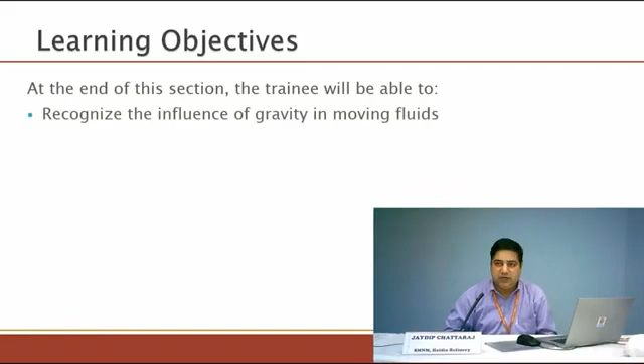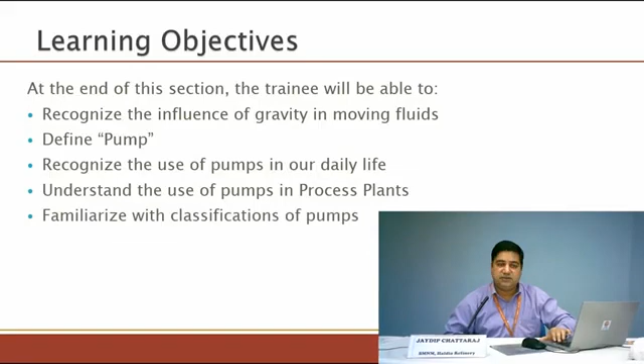Good morning. Myself, Jaydip Chattaraj. I am Senior Manager, Mechanical Maintenance. I will be giving a training on the topic pumps and compressor. So, what are the learning objectives? By the end of this course, we will be able to recognize the motion of the fluid, pump, what is a pump, and what it is used for in our daily life, understanding the use of pump in our process plant, familiarization and classification of the pump. This is basically the content of the course.

Now first we start with a simple analogy, the pump and our human body. In our human body, the heart functions similar to a pump; it pushes the blood to all the parts of the body. The same thing is happening in our process industry also. We need to carry various liquids, various process fluids from one place to another, and for that a pump is required. So this is our human body pump, which gives the fluid, incompressible fluid, to the various sections of our body, similar to a process plant.

So this is the heart. Now, for the blood to get elevation to the different parts of the body, to reach the head, it requires a head. So for that we require that head, or we require the pressure, which our human body pump gives. It maintains the pressure according to the need, from low to high.

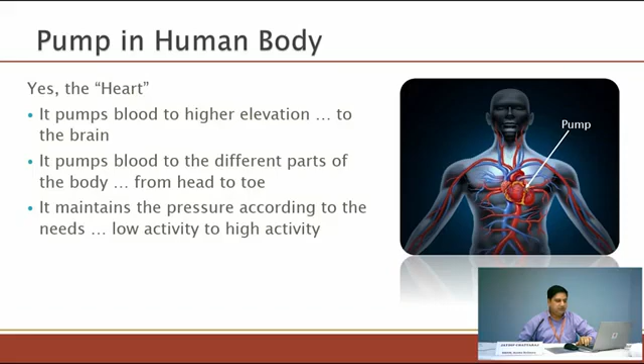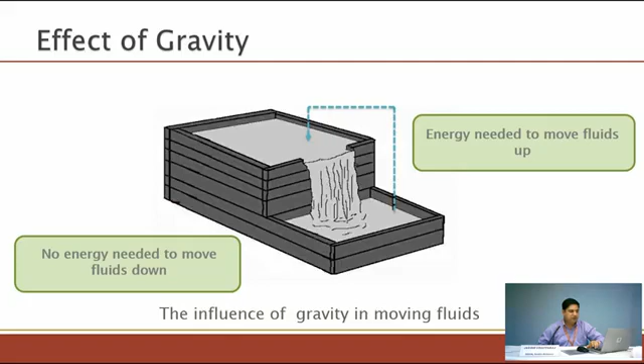A similar activity in the process fluid or any fluid: it generally comes down with gravity. It doesn't require any pump or anything. The liquid will flow from an upper portion or an elevation downwards in a normal process, due to gravity. But if we want to do the reverse, lift the liquid from a lower level to a higher level, we need energy to move it.

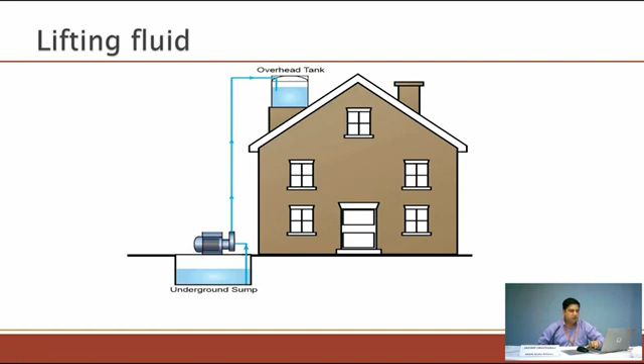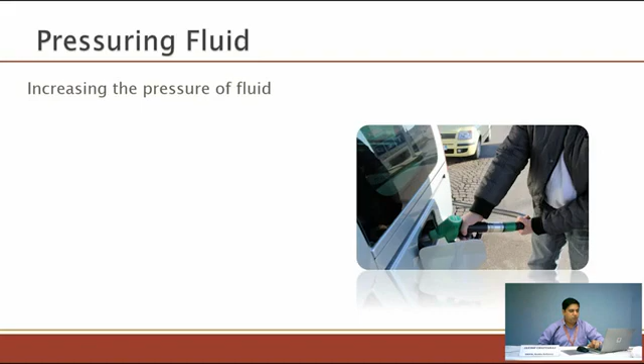So basically a pump is pressurizing the fluid, increasing the pressure of the fluid. This is a simple example in the petrol pumps. You see there is also a very small pump which is running and pressurizing the gasoline, which will be forced and loaded to your tank. So this is what a pump is. A basic definition: a device that moves the fluid through a mechanical action. Basically pumps do a conversion of energy, kinetic energy which is converted into pressure energy, and force the fluid to a higher elevation, longer distance, or a higher pressure.

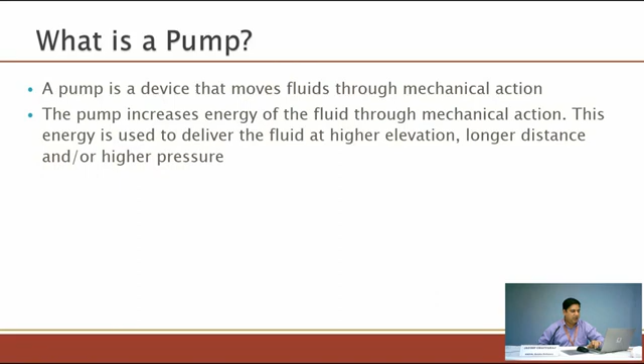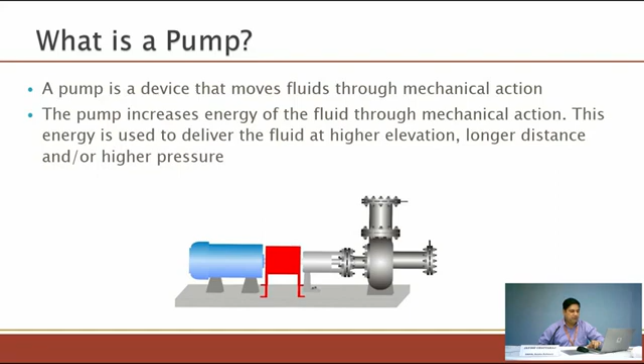This is a picture of an industrial pump. The blue portion is the motor or the driver. In between there is a coupling which couples the driver with the pump, and the pump pressurizes the fluid from suction to discharge to the final location. Now this is the application in the process plant. General application of pumps in industries such as refinery and petrochemical is transferring the liquid.

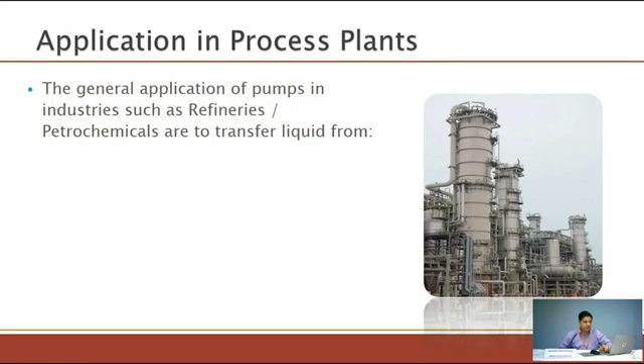This is a small glimpse of our refinery. The long columns are there and pipings are also seen. Now pumps are required to push the liquid from the bottom of the tank to this column, or from the column extract to another location. Basically from the lower pressure to the higher pressure region, or the lower elevation to the higher elevation.

Now we are coming to the types of the pumps. The pumps are basically of two types. One is kinetic or rotary type, another is positive displacement, where the incompressible fluid is positively moved from one place to another and it increases the pressure. Kinetic or rotary pumps are of two types: centrifugal and special service. Special service will go into detail.

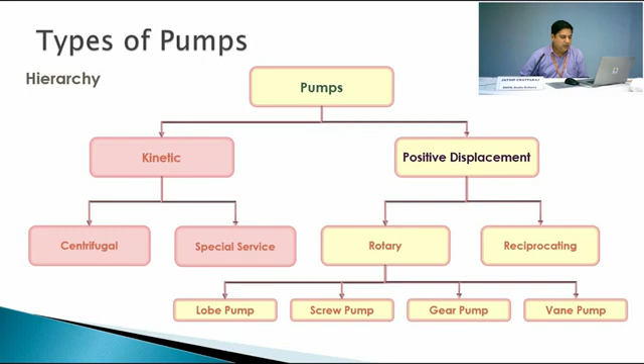And positive displacement, there are two types. One is rotary type, where rotational motion is creating that positive displacement, and another is reciprocating motion creating that positive displacement. Rotary pumps are divided into 4 different categories such as lobe pump, screw pump, gear pump and vane pump. We'll see some examples of such pumps.

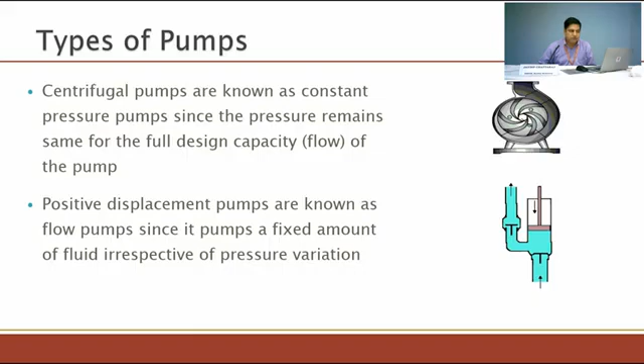The difference between centrifugal and positive displacement is that in a centrifugal pump we have a slippage, meaning not 100% of the liquid is forced to the discharge, but in a reciprocating pump 100% fluid is pushed through the discharge. So that is why it is called a positive displacement. But in centrifugal, some part of the fluid is going to the discharge and some part which could not attend goes back or slips.

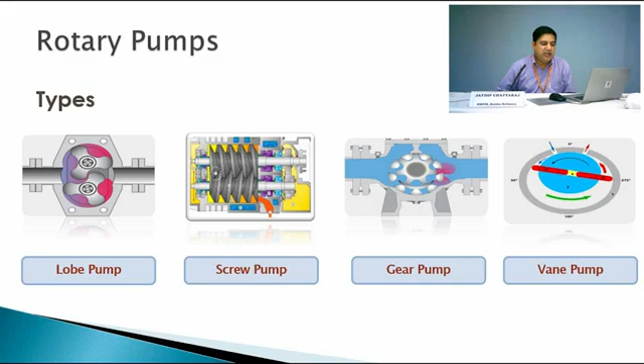In a centrifugal pump, a similar thing happens. When an impeller is being churned in a fluid, it pressurizes or increases the velocity of the fluid at the end and it gets a head or a pressure which is being collected in the discharge pipe and thrown to the process.

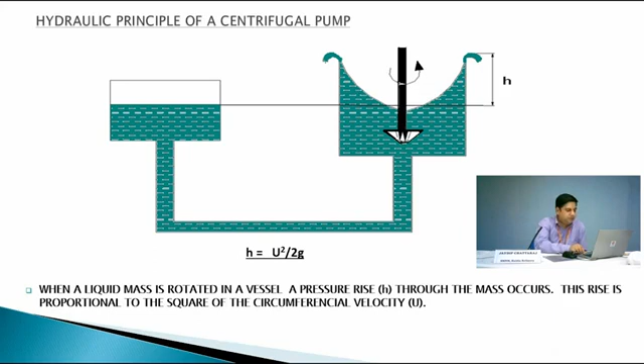This is another example of the basic operation of the centrifugal pump. The fluid is going to the suction eye of the impeller and it is being rotated by the impeller and it gets the motion. In the volute casing, you have seen that there is a less gap region. This area is called the cut water section, from where it collects the liquid and it's going through the more gap region and going to the discharge pipe.

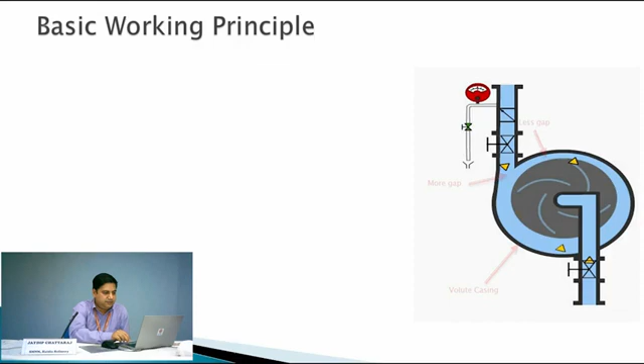So in the first region there is a high velocity but low pressure fluid, and in the wider region there is a low velocity, high pressure fluid. Basically the velocity is converted into the pressure. So the centrifugal pump works on this principle of centrifugal force.

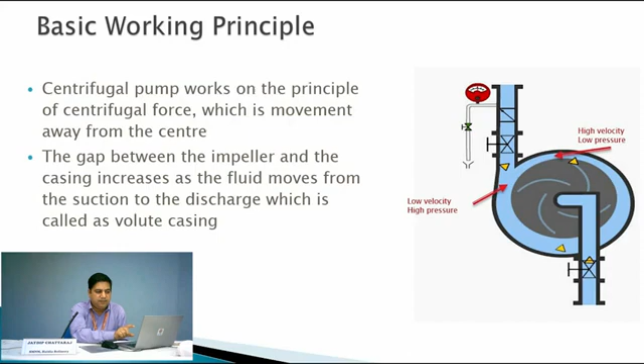And the gap between the impeller and the volute is constantly increasing, which is adding the extra liquid to this gap, and the liquid is getting a velocity through the rotational movement of the impeller. That rotational motion gives a velocity to the fluid, and this velocity, when it gets resistance, transforms into the pressure.

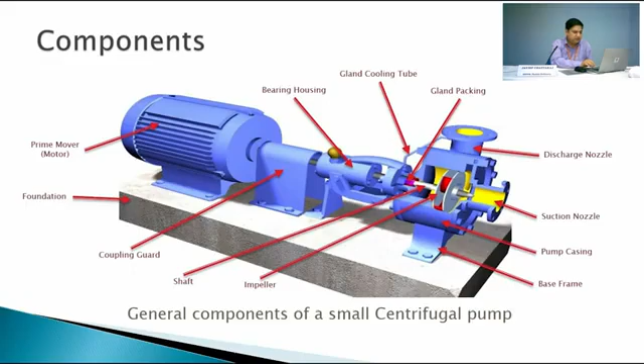And now the main components of this pump, shaft and impeller. The shaft is the main rotating part, which is transmitting the motion from the motor to the impeller, and the impeller is the thing which is giving the rise of velocity and pressure. This is a single stage pump.

Now for the multi-stage pump, the same thing is happening, only instead of one impeller, there are a number of impellers, and the discharge from one impeller is going to another impeller's suction, and then the discharge of the second impeller is going to the third impeller, then from the third impeller to the fourth impeller. This arrangement is a little bit different because here we need an axial thrust balance.

A pump has two sides, one is the higher pressure side and another is the lower pressure region. So there is always a thrust or force which is pushing these impellers from the higher pressure to the lower pressure, and this thrust needs to be balanced. That's why the impellers are arranged in such a way that one thrust and another thrust cancel each other out, and ultimately there should not be any imbalanced thrust.

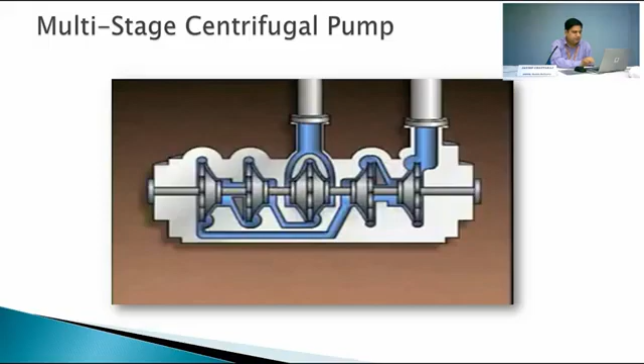A multi-stage centrifugal pump has two or more impellers. Why do we need a multi-stage pump? Because if we try to do it with one stage impeller, that impeller becomes larger. If our pressurization requirement is more, we require a much larger impeller, and such a larger impeller may not be feasible to manufacture. So in that case, we require a number of smaller impellers, splitting that large impeller into several impellers, so that the effect of the head rise remains the same, but the volume or size of the pump remains small.

So this is one construction of the multi-stage pump. This pump can be made with one impeller, but that impeller size will be very big, combining the diameter of all these four impellers. So it will be a large pump. To reduce the size of the pump, this type of multi-staging arrangement is done to get the required pressure.

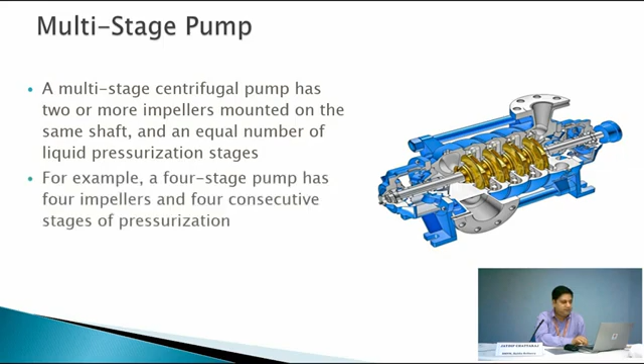Now the most important thing, why do we require the pump? We require the pump to overcome the head. In the first few slides I showed that the heart pushes blood to all parts of the body, overcoming the resistance. And in another photo I showed that water falls from a higher portion to a lower part through gravity, but if we want to do the reverse, we require energy to overcome that head. So understanding this head is very important, because that determines the selection, designing, or sizing of the pump. So this is the picture.

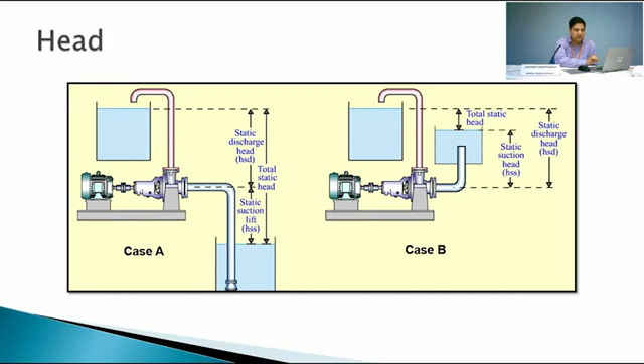In the second case B, the total static head is the difference of the discharge static head and the suction static head. This is explained in the equation: the static head is measured by subtracting the static suction lift and static discharge head.

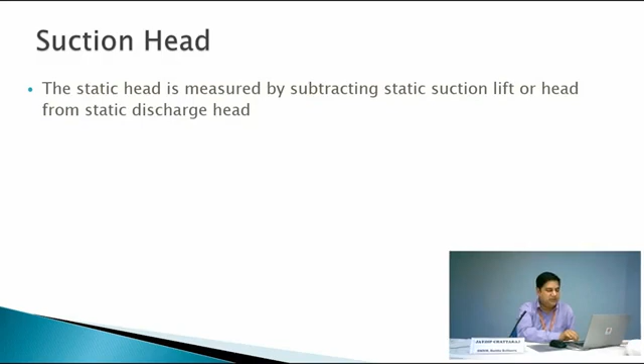Now, it is not always the arithmetic sum. If the pump is taking suction from a lower level, it may have a vacuum, so it's a negative pressure. So the formula is that for total static head, the suction head is basically a vacuum, so it is minus. Ultimately, the discharge head plus suction head will become the formula. And for the case 2 pump, it is the discharge head minus suction head.

Now we have to understand another important thing, the net positive suction head, which is required and is one of the utmost criteria for selecting a centrifugal pump. Definition: the net positive suction head is the real or actual positive head above zero pressure of the absolute energy which the pump requires to lift.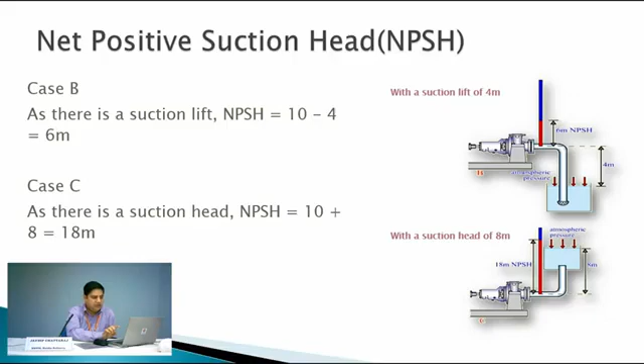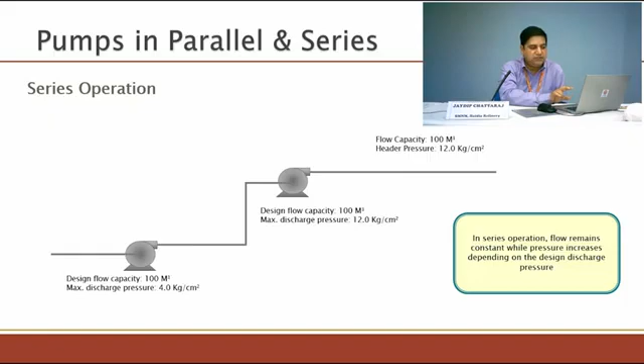But in series operation, it's different. If two pumps are arranged in series, the flow remains the same at 100 meter cube, but the pressure goes on adding. First pump's maximum discharge pressure was 4 kg, and for the second it is 12 kg, but the second pump's suction pressure is 4 kg, so the actual pressure added by the second pump is only 8 kg. So the first pump has a delta pressure of 4 kg, and the second has a delta pressure of 8 kg, and altogether 12 kg pressure is generated by these two pumps in series.

Now we will talk about codes and standards of the pump. As we know, the pump is a universal thing, available in the market with vendors, and when we require a pump there should be some basic standard which the purchaser requires and the manufacturer follows. So there should be a bridge between the manufacturer and purchaser, and these codes are for this.

In the petroleum industries, we generally use API standard. API is American Petroleum Institute. It gives a standard for all purchasers and manufacturers of the petroleum industry, and there are a number of codes, generally denominated by number. Standard number API 610 is the standard covering the centrifugal pump, how it will be designed, its features - these are all written in this standard, which both we and the manufacturer follow.

So whenever we want to purchase a pump, we mention this standard number only - we want an API 610 pump. Then all requirements for API 610, how the pump will be designed and selected, all guidelines are there, and both purchaser and manufacturer are guided by this standard. Both have to comply, meaning the purchaser cannot ask for something not possible, and the manufacturer cannot design something cheap or not good for the service.

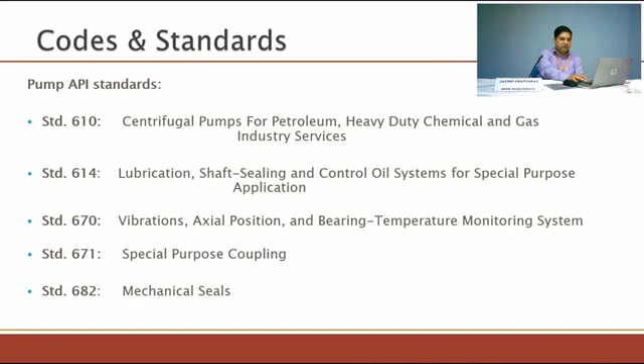Now next we will go for a compressor. In the first stage, what we talked about were pumps, because in the process industries we have two types of fluid: one is compressible, one is incompressible.

Compressible fluid means gas, and incompressible is liquid. For incompressible fluid, we use a pump to transport from one place to another, from lower head to higher head. A similar thing is required in industry for gases. But there is a lot of difference between the compressible and incompressible fluid. The properties are different, the centrifugal forces are different, so the equipment is different. We require different equipment.

The equipment required to transport a liquid from a lower pressure to higher pressure region is not the same as for a compressible fluid. Now we are talking about a compressible fluid, that is gas.

This is our learning objective: understanding compressors, identifying their types and their function.

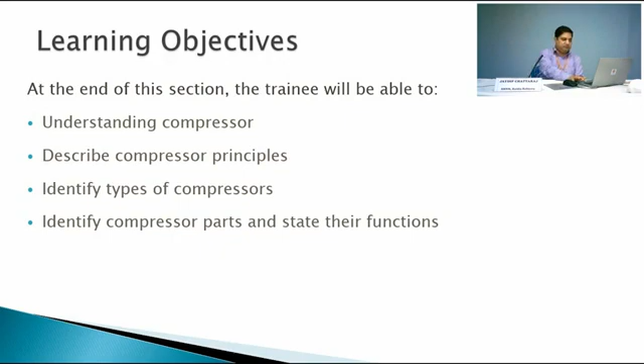So these are the contents of this course.

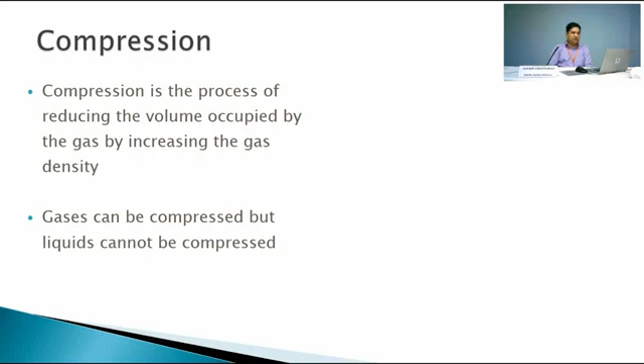Now, first thing, compression. What we need to know is compression. A compressible fluid, gas, can be compressed, whereas liquid cannot be compressed, but gas can be compressed.

If there is a volume V, pressure P, and temperature T, and these are constant, then if you increase the pressure, the volume will decrease and the temperature will also increase. I think you have already covered this in your basic physics course, which we show here to correlate academic courses with industrial application.

This is the basic thing you read in your basic physics book, but this physics principle is applied in our compressor. With this basic physics principle only, we are doing complex designing of compressors. So this is the simple thing.

If we keep the volume half, then the pressure will increase and the temperature will increase.

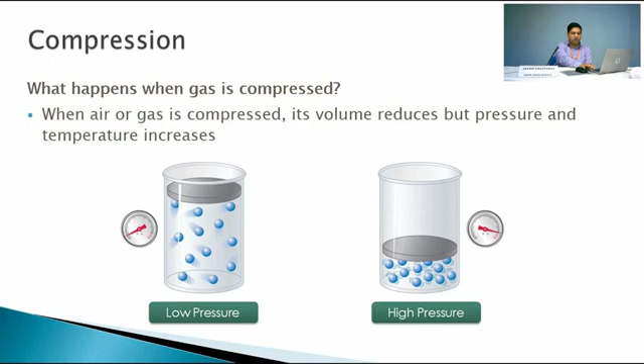So in molecular movement, at low pressure the molecules are in a distributed state, and at high pressure molecules are concentrated. So what does a compressor do? It gives energy. It compresses the molecules to a lower dimension or lower volume.

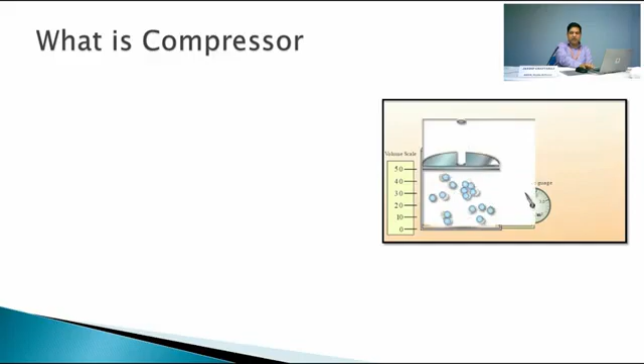So this compressor looks similar to the pump, but it requires more energy because an incompressible fluid requires less energy to get pressurized. In an incompressible fluid, the liquid molecules are almost closely packed, so no energy is consumed in compressing the internal molecules. So whatever energy we give is directly converted into liquid head energy.

But for the compressor, it is not so. Whenever we give energy to the compressor, it will first increase the density of the molecules, increase the compactness of the molecule, and then it will get the pressure rise. So the consumption of energy in a compressor is much higher than in a pump.

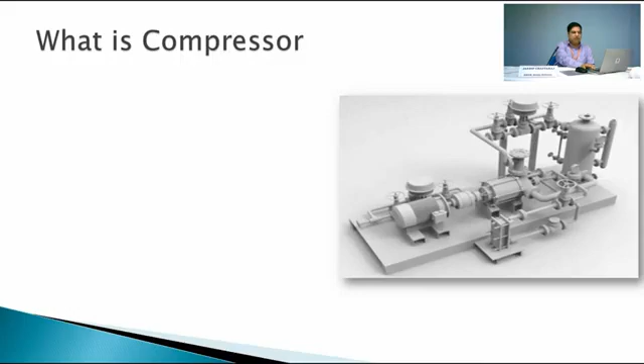Now, in our daily simple life, where we see the use of a compressor: when we try to inflate our tire, we use a compressor or a simple hand pump to increase the pressure of the air and put it into the tire.

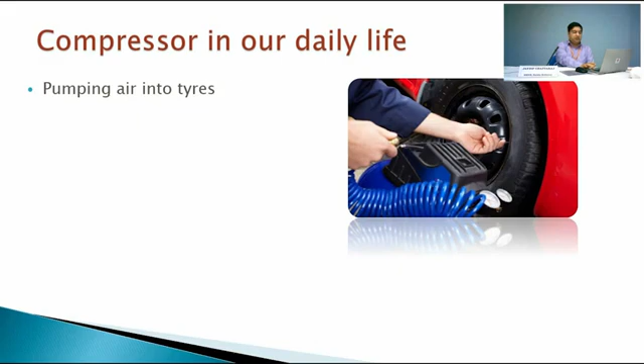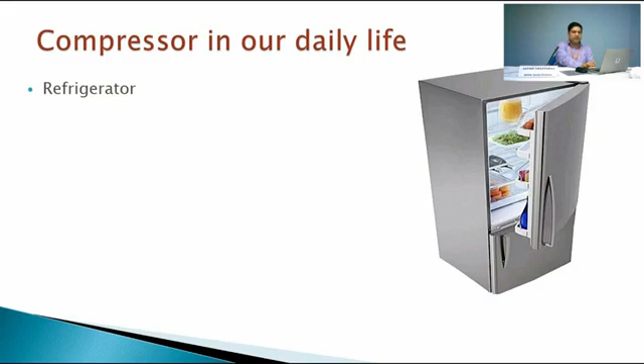Another example in our natural daily life is the refrigerator, where we have one compressor which compresses the refrigerant gas from gaseous stage to liquid stage, and then heat is absorbed, liquid is again converted to gas, and this cycle goes on.

Now, in industrial applications, when we are handling hydrocarbons, when we heat hydrocarbons in our industry, some of the lighter hydrocarbons are converted into gas. As we know, methane, ethane, propane, meaning C1, C2, C3, these are all in gaseous state.

In the oil industries, the input well or crude oil is a mixture of all sorts of hydrocarbons. When we heat them up, they get detached and the smaller hydrocarbons go out as gas, such as LPG gas, which is C3.

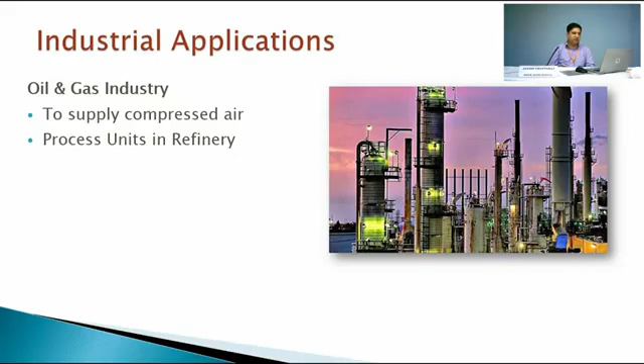So we need to transport this gas from one place to another, to store this gas from a column to some other tank or a bullet. We require this gas to be forced from a lower pressure to a higher pressure region, or from a lower head to a higher head region. For that we require a compressor.

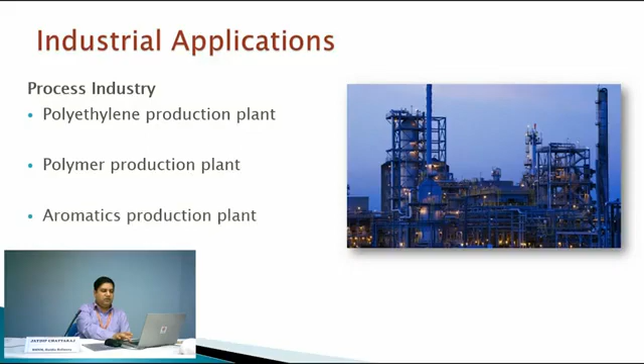So basically the transportation of the gases, and it is also used in the air separation plant. In the steel industry also, a lot of gas is being generated in the furnaces, the blast furnace. A lot of gas, burning blast furnace gas, is being generated. That also needs to be transported, and there also we require a compressor to transport this gas. In the petrochemical industry, there are also polymers, polyethylene. We also require a compressor for the transportation of the gas.

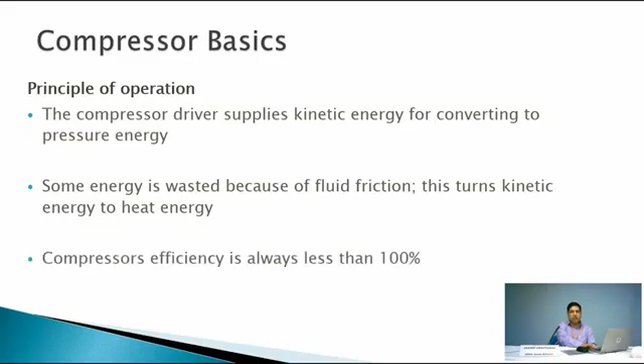Now let us come to the basic operation principle, which is similar to the pump. It's all about changing the kinetic energy to pressure energy. As I have told you during the session on pumps, some energy that we are giving as input is lost due to friction. Similar is the case of the compressor. Whatever energy we are giving, some is turned to gas kinetic energy, and some is wasted due to friction. So the overall efficiency is always less than 100%.

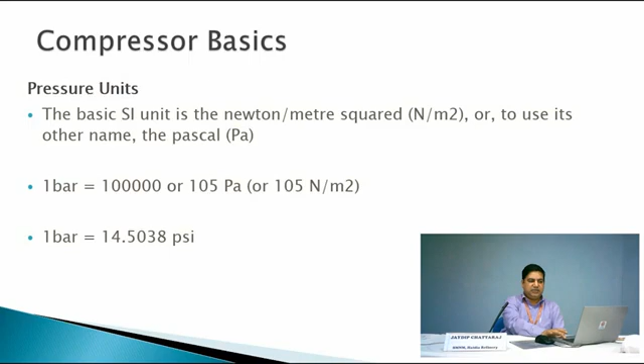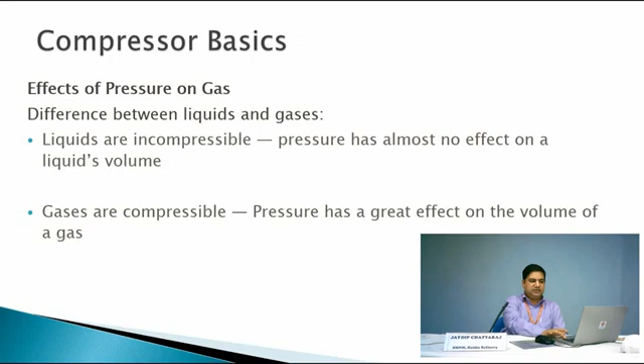Now some basic things: the units of measurement, Newton per meter square and the Pascal. 1 bar is equal to 14 psi, because these are required for understanding further. So these are the basic theory. This means the difference between liquids and gases. Liquids are incompressible and gases are compressible, and that's why the theories are also different. Now for the compressor basics, we require 2 or 3 gas laws. One is Boyle's law, another is Charles' law.

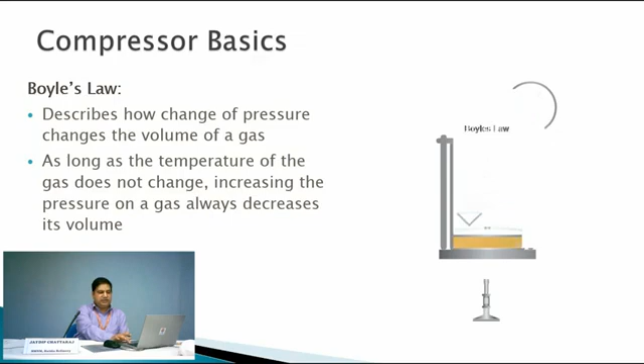Now for Boyle's law, as long as the temperature of the gas does not change, increasing the pressure will decrease its volume. This is very simple. If we increase the pressure, the volume will get decreased. Basically, the pressure into volume will remain constant. If we increase the pressure, volume will decrease. Volume will increase, pressure will decrease.

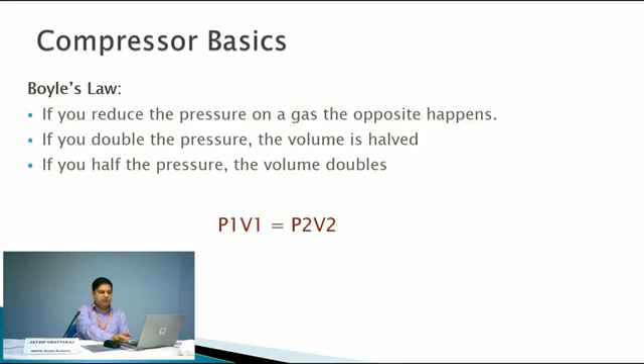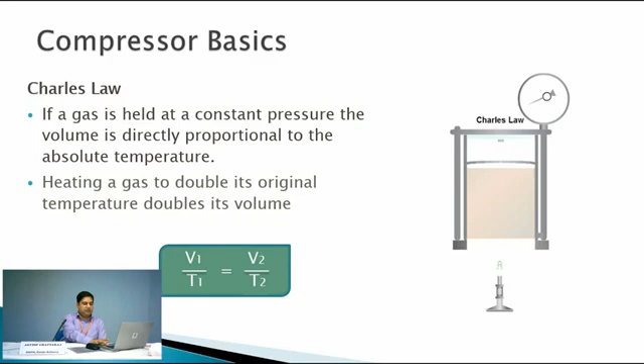And Charles' law is with the temperature. If the gas is held at a constant pressure, the volume will increase if the temperature is increased. So this is the formula, V1 by T1 is equal to V2 by T2. And now combining these two gas laws, the relationship is P1 into V1 by T1 is constant. P1 into V1 by T1 is equal to P2 into V2 by T2. And this is the basic principle which is used in compressor design, in all compressors.

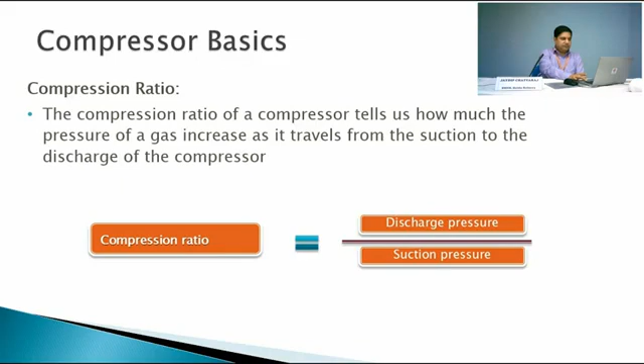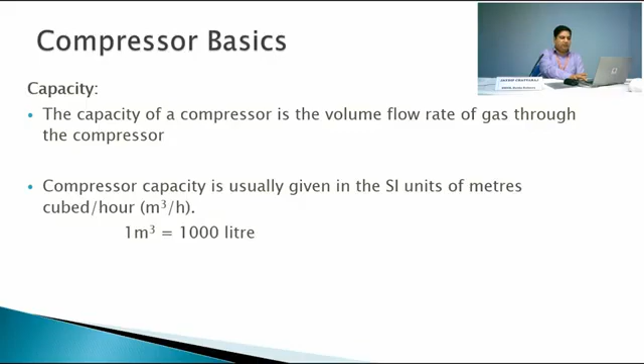So the first thing is the compression ratio. What will the compressor do? It will increase a lower pressure air to a higher pressure. So there is one discharge pressure and one suction pressure, and the discharge pressure by suction pressure is the compression ratio. This is the basic guiding principle of designing a compressor. Now, what is the capacity of the compressor? Capacity of the compressor is basically the volume flow, how much volume is flowing, and that can be simply measured in meter cube or in liter. So the typical parameters of a compressor are suction pressure, discharge pressure, suction temperature.

As I have shown in the pump, the compressors can be connected. In fact, in industry, we always see the compressors being connected. First stage, second stage means compressors are connected in series to reduce their size. As I told you in the pump section, if we design a pump with a single impeller, then the dimension of the pump will increase manifold. So we need to reduce it, so we divide it into a number of stages. Similarly, for the compressor, we need to divide into stages so that the entire system for a desired purpose remains compact.

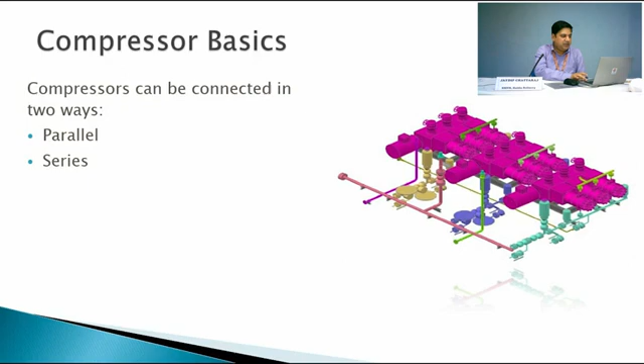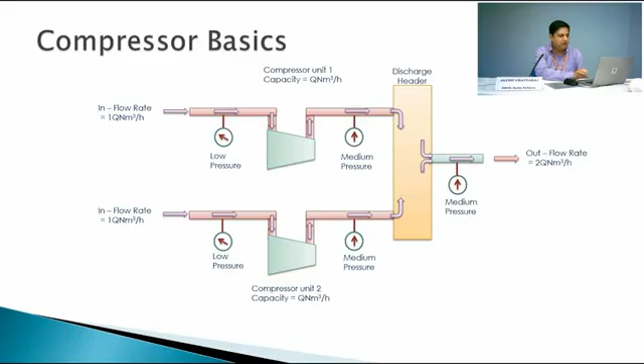So here also we are seeing a parallel connection and a series connection. Parallel connection always increases the capacity. These two compressors connected in parallel will increase the flow but not the pressure. When the compressors are connected in parallel, they add the flow but not the pressure.

And in series connection, the volume or the flow remains the same, but the pressure will increase. Means one compressor will increase the pressure head, the second compressor will further increase its head, and in this way they go on adding the heads, and ultimately the compression ratio, or the discharge head over suction head, will increase.

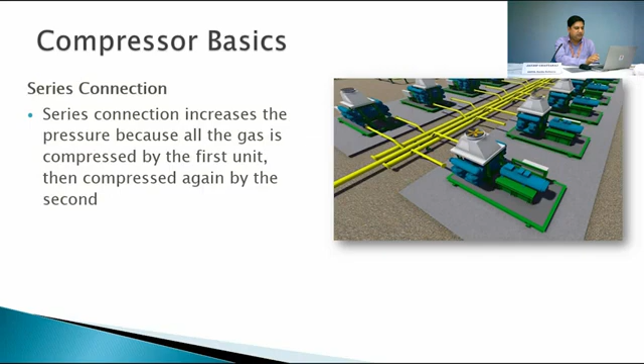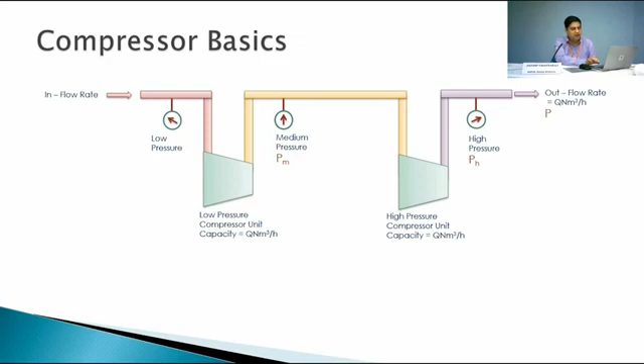So this is a series connected compressor. The flow is getting into the first stage, then a medium pressure is generated, and that medium pressure is going to the second stage, and it is giving a higher pressure. But the volume flow rate in the first compressor is same as the volume flow rate at the last compressor. So

When compressors are connected in parallel, what can we do? If we are connecting 3 compressors in parallel and then we are running 2 compressors, then if we require to stop one compressor, we can run another compressor and stop another, so the total volume flow remains the same, and we can make one compressor redundant for maintenance.

So that is the basic principle for connecting the compressor in parallel. And whenever full capacity is not required, we can stop one compressor. But if we use the compressor in series, then the flow will be stopped if one compressor is being stopped.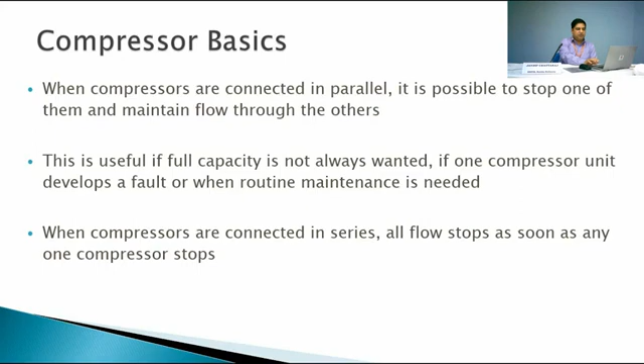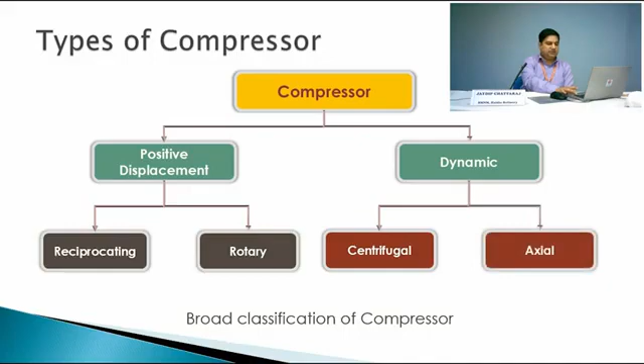Now the next is the selection of the compressor. How do we select the compressor? Basically what do we require, why do we need a compressor? We need a compressor to transport some gases of a particular volume as per our requirement from a certain low pressure region to a certain high pressure region. So our requirement is a quantity of gas or the flow of gas and the delta pressure, means the difference between the high pressure and the low pressure. So these two are the basic requirements. With this requirement, we are going to select the compressor.

Now, in the first case, if we require a high pressure but low flow, then we should select a reciprocating compressor. Because a reciprocating compressor is a positive displacement type compressor, its compression ratio is higher, so it can increase the head from lower to higher, but it has a limitation in volume. For the volume capacity, the compressor size will increase like anything, means the compressor will become bigger.

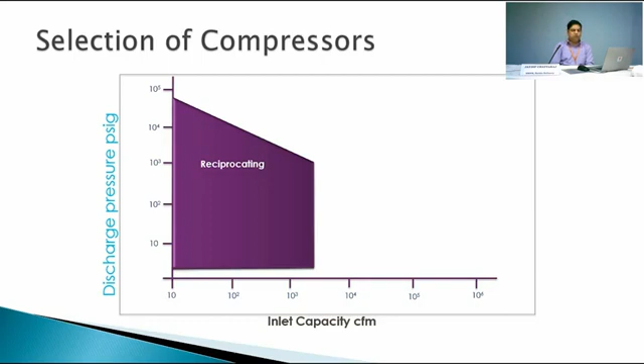So if we require a very high volume, then this reciprocating compressor will become very robust or very big. That size is not suited. So for the reciprocating compressor, the selection range is high head and low flow. Wherever flow requirement is low and the head requirement is high, we select a reciprocating compressor.

Now when the head requirement is moderate but the flow requirement is more, we require more flow. So in that case, we are using a centrifugal compressor. But for very low flow, a centrifugal compressor is not suitable. There will be a problem of surging. So a centrifugal compressor should have some minimum flow. A reciprocating compressor can be designed for a very minimum or low flow, but a centrifugal compressor cannot be designed for a low flow.

And for a very high flow and low pressure region, axial compressors are being selected. And this middle portion is a screw compressor. A screw compressor is something in between a reciprocating compressor and a centrifugal compressor. It is a positive displacement compressor, so its basic principle of operation is same as a reciprocating compressor, but as it is rotating, its efficiency is like a centrifugal compressor, so it's operating between centrifugal and reciprocating.

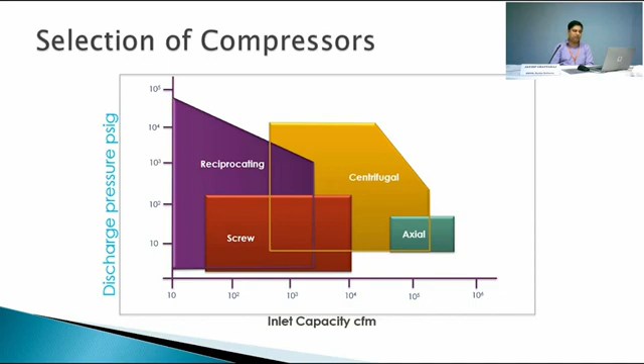But a screw compressor also has a limitation, it cannot work with a very low flow. It will also have a problem of surging.

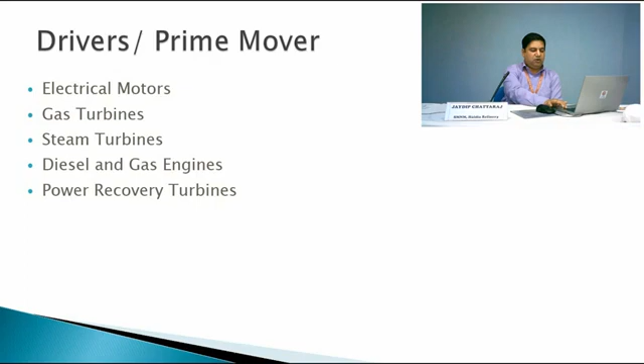Now coming to the driver or the prime mover. For both the compressor and pump, we require a driver or a prime mover to give the energy, meaning electrical energy or steam energy or something, which needs to be given to this pump or compressor to energize the liquid, either compressible or incompressible. So what are these drivers or prime movers? These are electric motor, gas turbine, steam turbine, diesel or gas engine, and power recovery turbine. These are the different types of prime mover.

From the name itself it is known that the electric motor works on electricity. In the gas turbine, the gas is burned and energy is generated, which in turn drives the rotor. In the steam turbine, steam energy is consumed and gives kinetic energy to the rotor. In the diesel engine, the energy source is diesel, which is burned and rotor energy is generated. The power recovery turbine is another process thing.

Power recovery turbines are used wherever we have some excess power. In this total training I have shown you the movement of incompressible or compressible liquid from a lower energy or lower pressure to a higher pressure region. But in the process industry, there are some places where higher pressure gases are present and we need to discharge them at a lower pressure. So the energy is being wasted. If we need to discharge that high pressure gas, the pressure will be lost and the energy will be lost.

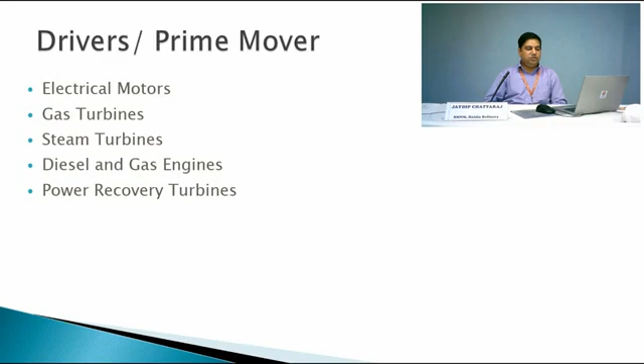To recover that energy, we use the power recovery turbine. The high pressure gas or liquid passes through this turbine and it gets kinetic energy. This kinetic energy works as a prime mover and in turn gives energy to the pumps or compressor. So this is the end of this course, which gives a general overview of pumps and compressors.

So one last recap of what we have learned: in industrial processes, we use pumps and compressors for the flow of compressible or incompressible fluid from a lower pressure, lower head region to a higher head or higher pressure region. Pumps are for incompressible fluid, compressors for compressible fluid. Compressors require higher energy because compression requires more energy; pumps require less energy. Their basic principles fall into two categories: one is the positive displacement principle and the other is the rotary or centrifugal principle. Their division and construction are based on that.

Then head rise, and for the pump the net positive suction head, which is very important to select a pump. A pump will not function unless it has net positive suction head. We face this problem in our house also. Whenever our tank level goes down and it doesn't get the required net positive suction head, the pump cannot give the water. Sometimes your pump gets cavitated, sometimes it cannot give the proper flow because of the net positive suction head. For the compressor also suction head is required, but that is a little different from incompressible fluid suction head.